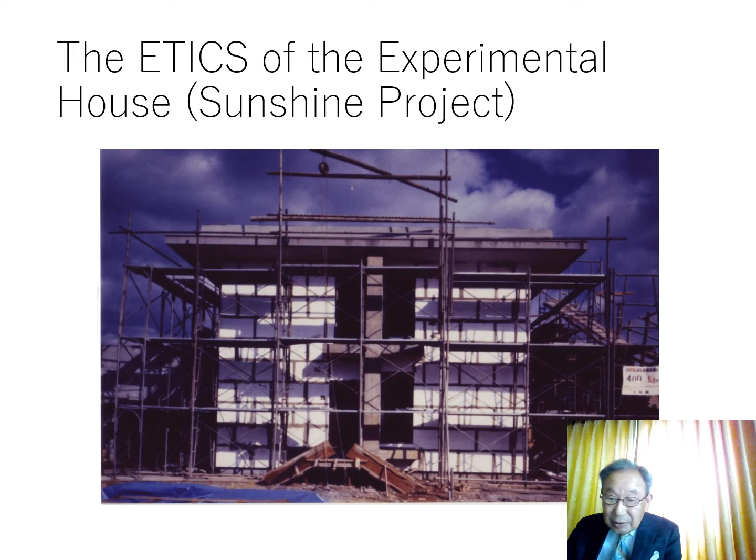The building site with ETICS. The thickness of the insulation materials was 10 centimeters. The attachment of the insulation materials, EPS.

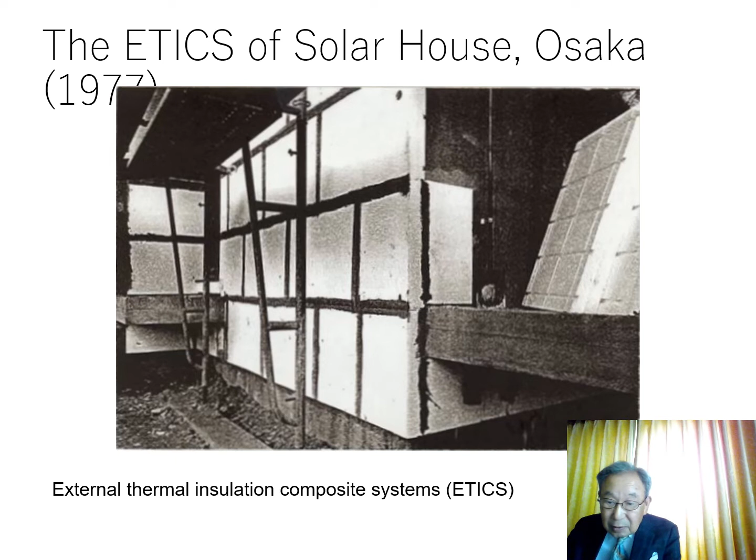I built a solar house for myself in Osaka in 1977. I also applied ETICS for this house. I have lived in this house ever since without any complications or problems. This solar house is heated and has warm water supplied by solar energy.

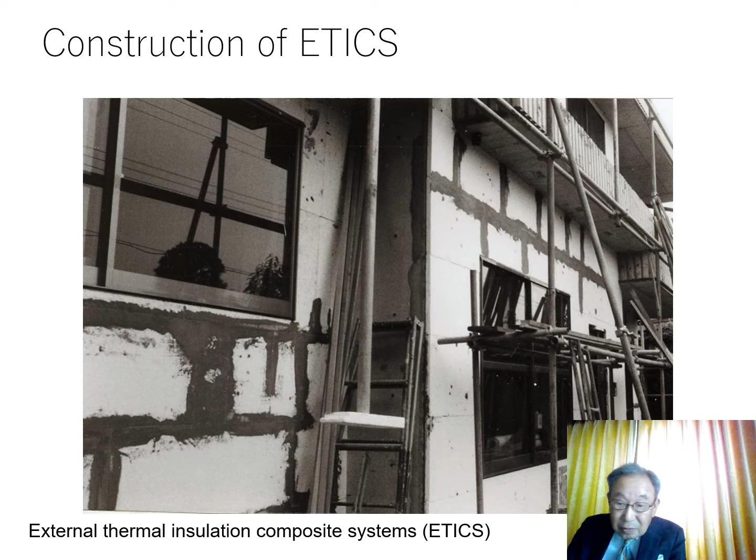In my solar house, passive cooling is used in summer, using the chimney effect. In the winter, the basement windows are closed and it is heated through the greenhouse effect.

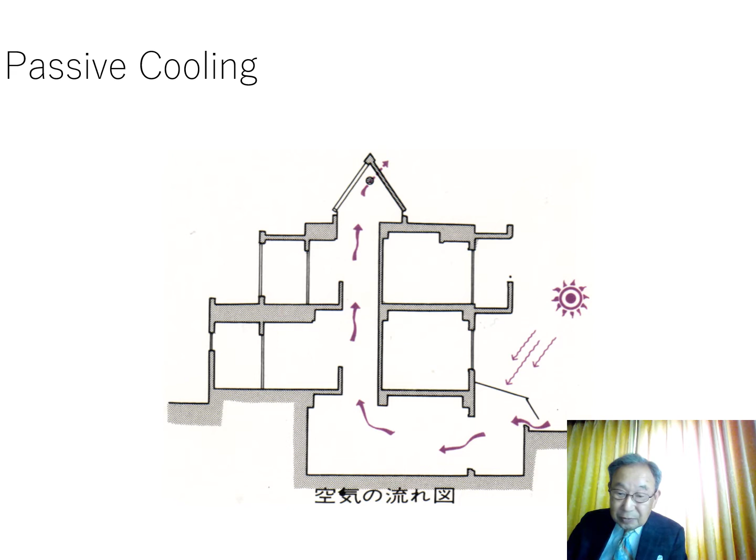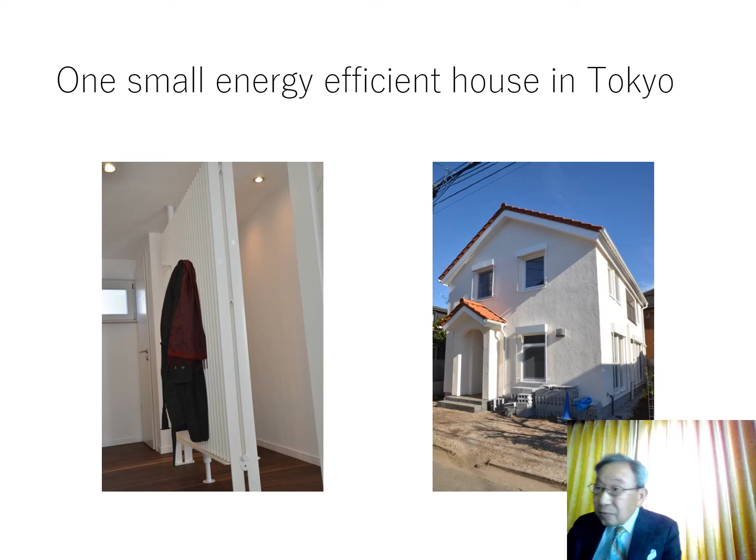I built a highly airtight and well thermally insulated house in Tokyo in 2015. High density wooden panels were attached to the external walls. They were also insulated by an ETICS.

The surface of the wooden fiber boards was coated with a thin adhesive mortar to prevent cracks. Alkali-resistant glass fiber mesh was embedded in the mortar layer.

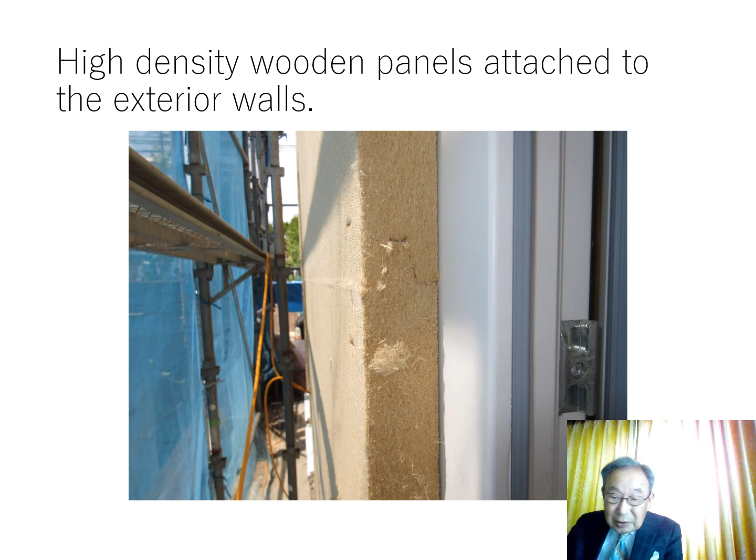Usually, this radiator panel is used only for heating, but the heating element was used also for cooling by circulating chilled water from a heat pump. We measured air temperature distribution using a thin cloth sheet and thermal camera.

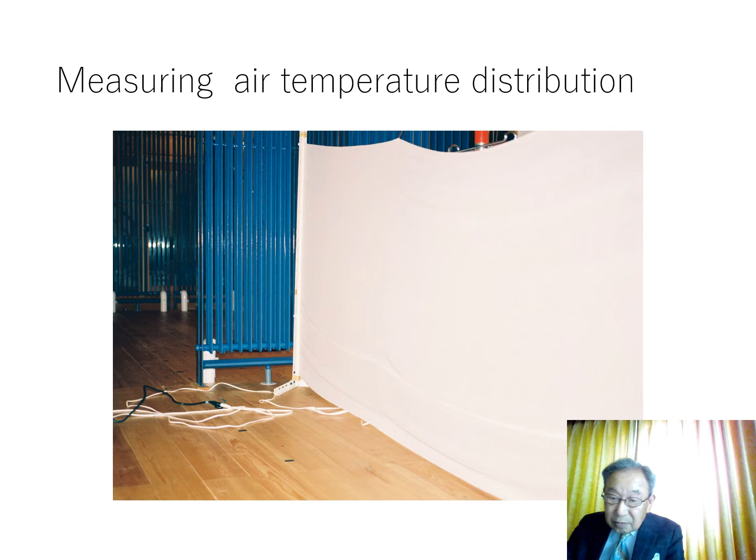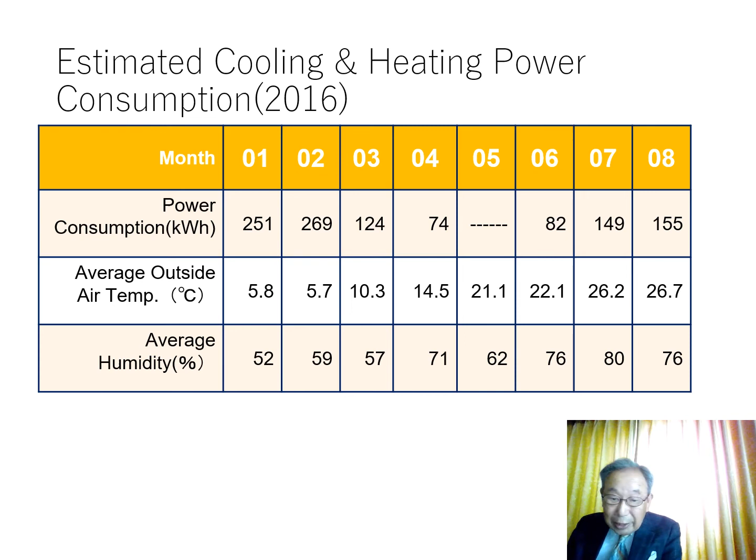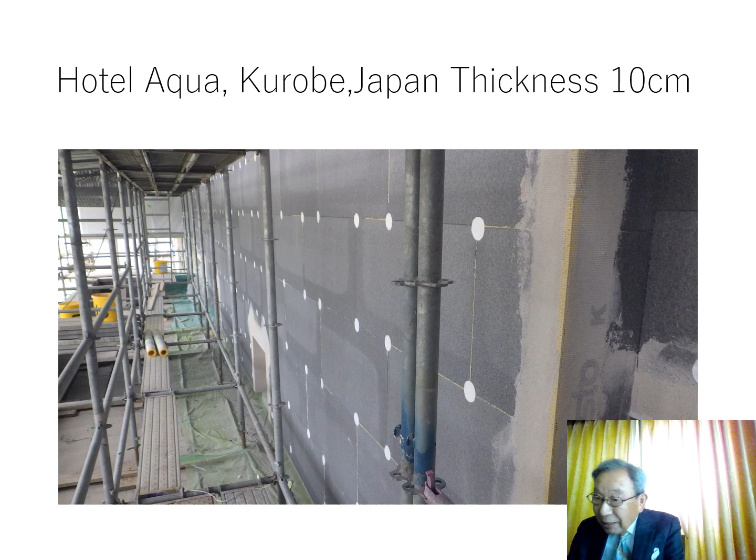The actual reduction will inevitably require a change of lifestyle and cost burden. I think that the associations of European countries are also trying to popularize the thermal insulation of buildings. We will continue to cooperate with each other and strive to popularize ETICS. It is necessary to make concrete measures involving citizens and local governments. We would like to learn from Europe on these points.